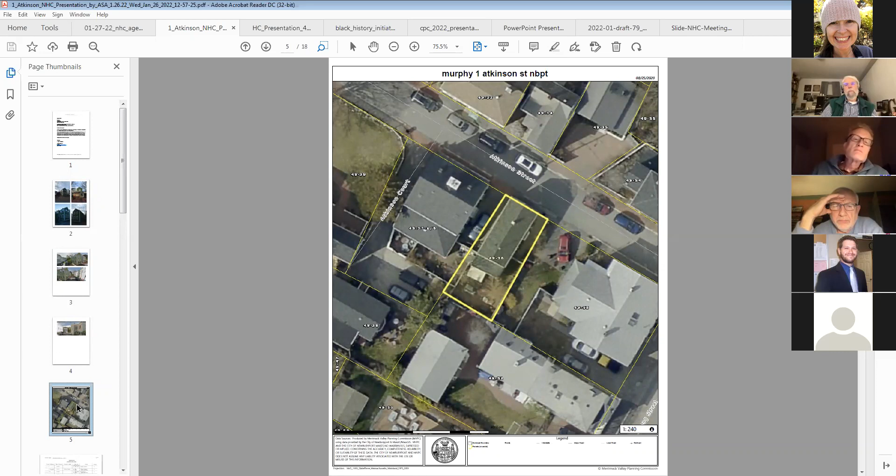And what's that whitish area just at the rear there, is that - I think if we go back to the photographs, it might be easier to tell what that is. Yeah, you see it's sort of a freestanding shed that would be removed. Oh, I see.

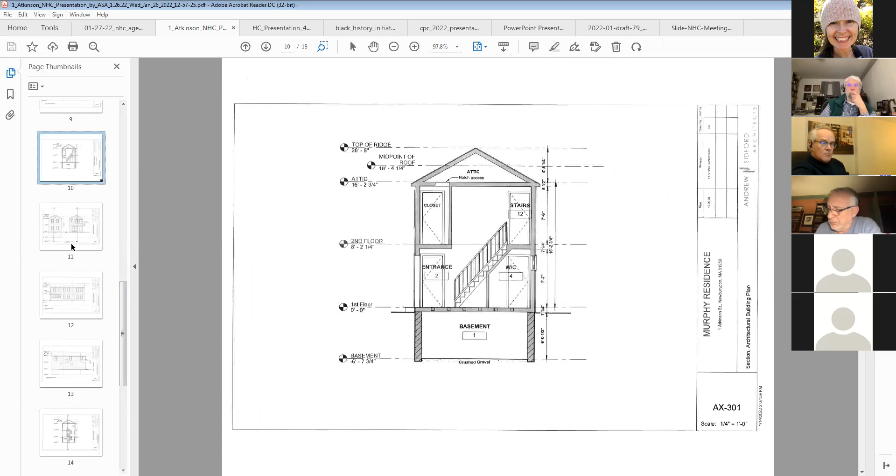You'll excuse me, but this presentation is actually for zoning as well, so some of these we don't need to go through. This one, you'll see on the left, this is the front elevation of the house and it does not change.

The back elevation shows the new windows being added on the rear facade to the rear yard. They won't be seen from the street. The intention was to use the same 2/2 design of the original house, but we're adding a little more light into a master bedroom and a kitchen downstairs. This shows that shape-wise and proportion-wise, it's the same as the front of the house.

Next slide please. This shows the side elevation, the dotted line shows where the proposed fill-in is. The original windows of the house remain the same, primarily. It's in the back section, where the new kitchen and master bedroom are, that we've added a few, but the intent is to use the original materials, the original detailing, and 2/2 windows. So that shows the rear.

So did I hear you say that this window here, you would try to match the existing windows on that side? Right, you can see the proportions of the new window in the back there - that is the same proportion and size as the original windows.

And when we had to change it because it's above a counter, we're still going with the 2/2 window. That's the kitchen below, I assume. Yeah, correct. Maybe I wonder if it's just a drawing.

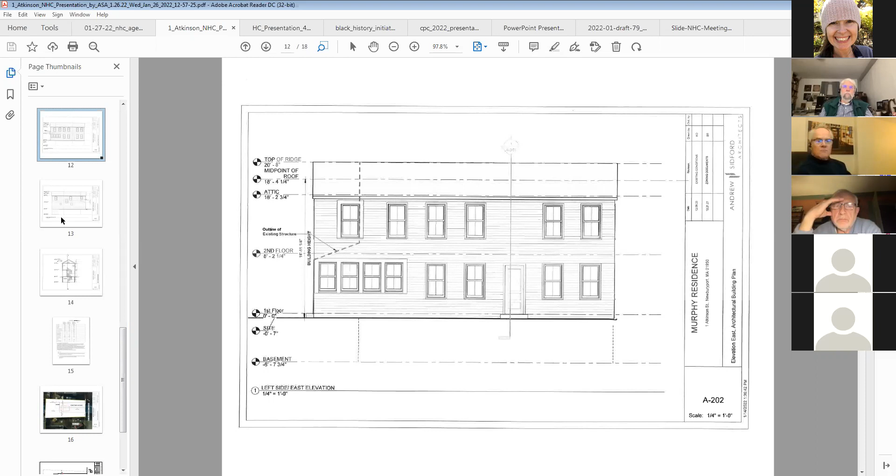Thank you. Next slide please. Again, this shows from the other side, we've added a new window at a new stair, and that's to match the windows in the front of the building. And where we can, in the back, you can see where we've intended to fill in.

And I assume in your demo calculations you included whatever demolition, wall demolition was required for the new window openings? I think so, I honestly don't have those numbers in front of me, but I believe so. Yeah, because that would be the norm. So that's about all I have for the presentation.

Yeah, it's pretty straightforward. Before I open it to public comment, is there any question or clarification from my fellow panelists, board members?

I believe the owners are here as well, if you have questions for them. Okay, well, I'm not seeing any hands or anything like that. So why don't I officially open a public comment period?

And I explained the rules earlier. If you would like to make a comment, can be pro, con, or neutral, whatever, please use the Zoom controls to raise your hand so that Caitlin, who's running the meeting, can recognize you so we can unmute you and allow you to be heard. So we'll pause for a few moments while we see if anyone wishes to be heard.

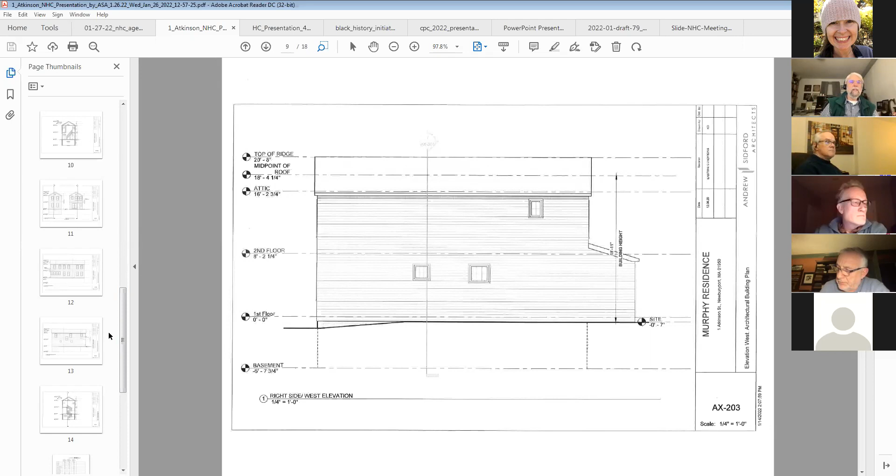As long as we're on the topic of windows, one last question. On the back, if you can see it, probably around slide 11, Caitlin, where we're looking at the rear view - those, you've got 2 windows that look like they're in funhouse mirrors, stretched almost all the way to the ground. Are those actually regular windows, or patio door windows? What's going on there?

They're regular, depending on the definition of regular windows. Those are tall double hung windows to bring light into the kitchen, because that's where there's no cabinetry, and we're really trying to open up some views and light to the backyard. So the sill of that window will be quite close to the floor, it looks like. Yes, okay.

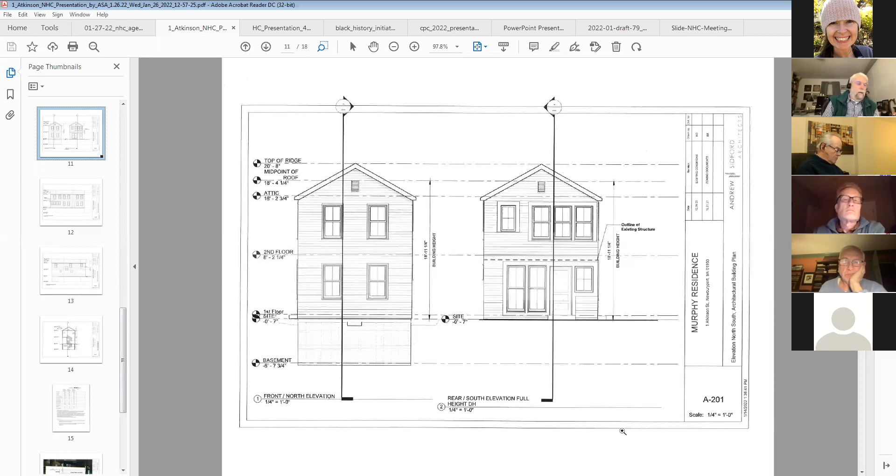Would anyone care to make a motion? At this point we need to decide if it is preferably preserved, which means we would need to approve the plans before any demolition and rebuild can happen. Do I hear such a motion? So moved, that sounded like Sandron, Mark. Okay, is that seconded?

Anyone want to second Mark's motion that it's preferably preserved? I'll second that, this is Peter. Okay, thanks Peter. So, Mr. Carnwath, your vote. It's historically significant, but preferably preserved, and we'll take a vote after this on the actual plans to approve those or not.

So Malcolm, affirmative. Thank you. Mark Sandron, yes. Thank you. Peter McNamee, yes. Thank you. Joe Morgan, yes. And the chair is yes.

So technically that imposes a 1-year demolition delay, but we'll take another vote on a motion to approve the plans and remove the demo delay based on the presented plans as explained and gone over this evening. Is there such a motion on the floor? The motion would be to approve the plans as presented and release the demo delay. This is Peter, I'll move that we approve the plans and remove the demo delay.

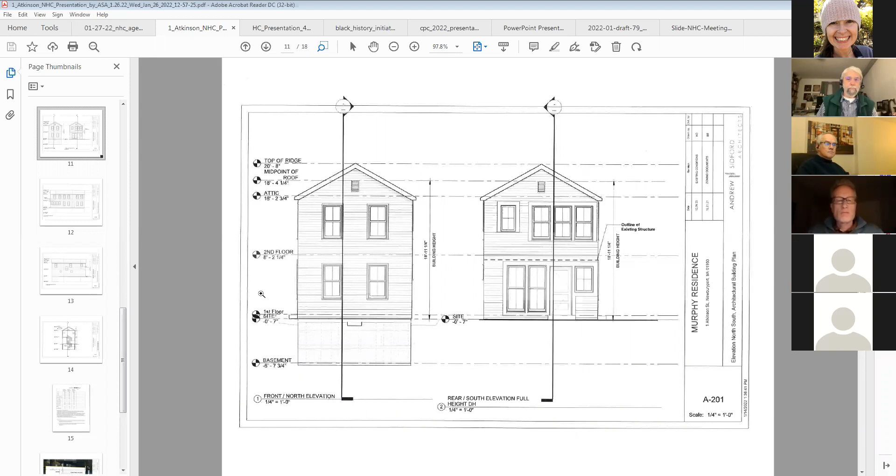Okay, so Andrew, that means - well, I'm sure you know what it means if you've been here before - that the demo delay was imposed for a matter of minutes, and your owner/applicant can proceed with the various other permits required. We've probably got an upward extension of a nonconformity or some such thing to worry about, but you can move on to the next step. Very good, appreciate your time. You're welcome, thank you everyone. Thanks for coming down.

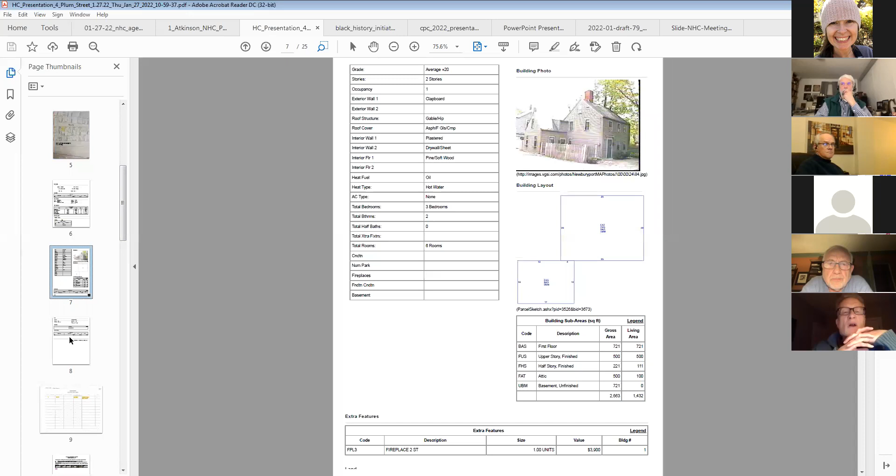And just next slide, please, Caitlin. You can skip through that one, actually—that's just to complete the property record card. So this is the district data sheet officially from the city's records for Plum Street, map 52, parcel 53, circa 1800 timber frame half house.

And then on the next slide, you can see that it actually is consistent with the historicdistrict.org records, but just so we're singing from the same sheet of music, this is what we have for the district data sheets. So going to the next slide.

We also saw additional information—the Form A for the Washington Street Residential District. It does include Plum Street in the broader map of everything in that neighborhood. It doesn't mention Plum Street specifically in its text—I've read through it a few times. It does have a map of the houses and structures.

Particularly, it circles the ones that have their own Form B and have been singled out. The closest one is two houses down on Elm Street, 15-17 Elm Street. That does have its own Form B that I've also reviewed. It doesn't really lend any breadcrumbs about 4 Plum Street.

The Form A does mention that this area provides an excellent illustration of the development of a residential area which had its beginnings in the early 18th century. Architectural styles dating from the mid to late 19th century are also found in this area, which I think is a very accurate description of the Plum Elm Street neighborhood. If you recall the district data sheet for Elm Street, it has a mix of early to mid-1700s homes, but also early to later 1800s homes. So that's probably the best way to describe the neighborhood.

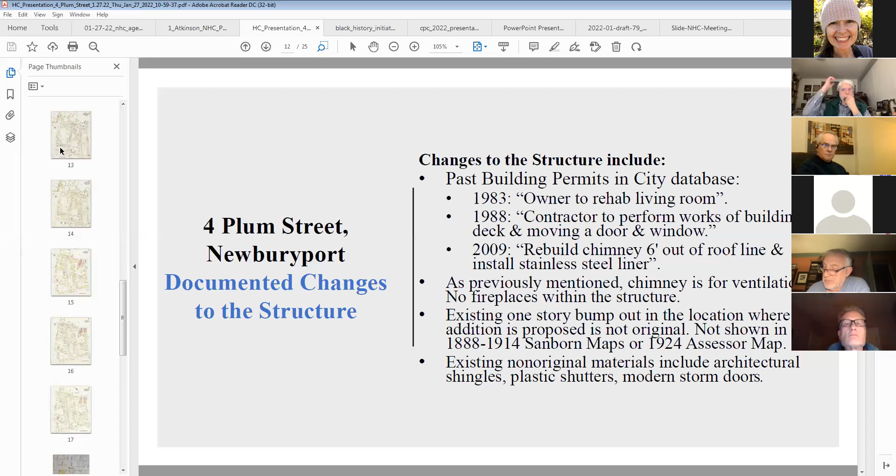Probably the biggest, most noticeable change is that one-story bump out, which is the location where the addition is proposed by the applicant. The Sanborn maps we included don't show that bump out, nor does the 1924 Assessor's Map. There are also non-original materials, including architectural shingles, the plastic shutters being removed, and the modern storm doors.

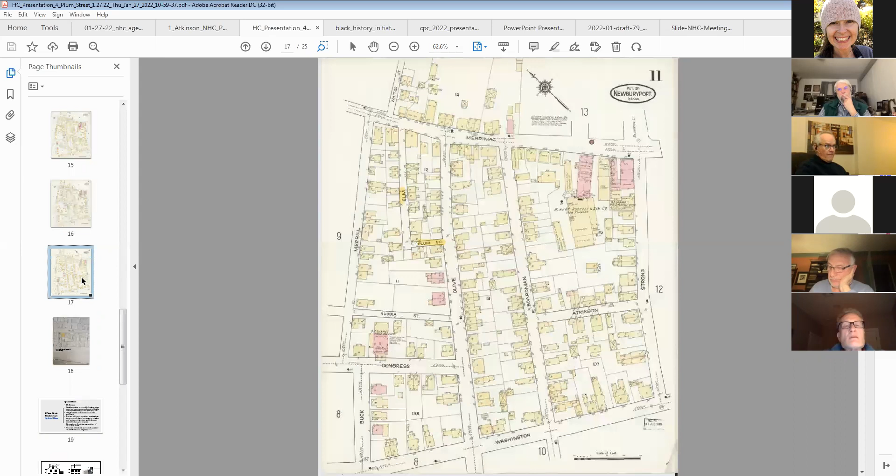Finally, we've seen this already, but again, 1924—no bump out off the back. So finally, let's get to the updated plans. Next slide, please.

I'll talk about the plans briefly—Jeff will go over them more in depth. First of all, there's no dormer proposed in the new set of plans. I think that was the strongest feedback we got at the prior meeting, so that's gone, not proposed, and not included in the plans currently in front of you.

The addition has been made smaller. It's located where the one-story bump out currently exists, and it's gotten a little smaller in footprint, I'm informed, and the height is much lower—it's gone down below the ridge of the existing structure. Also, the overhang over the doorway is a lot smaller now.

Structurally, the new addition is going to be supported by its own foundation. It's a lot less invasive, cutting into a lot less of the existing structure and roof, placing less strain on the existing roof system. The dormer's gone, so there's a lot less pressure on the structure, and because it's smaller and cuts into less of the structure, it's far more reversible than what was previously proposed.

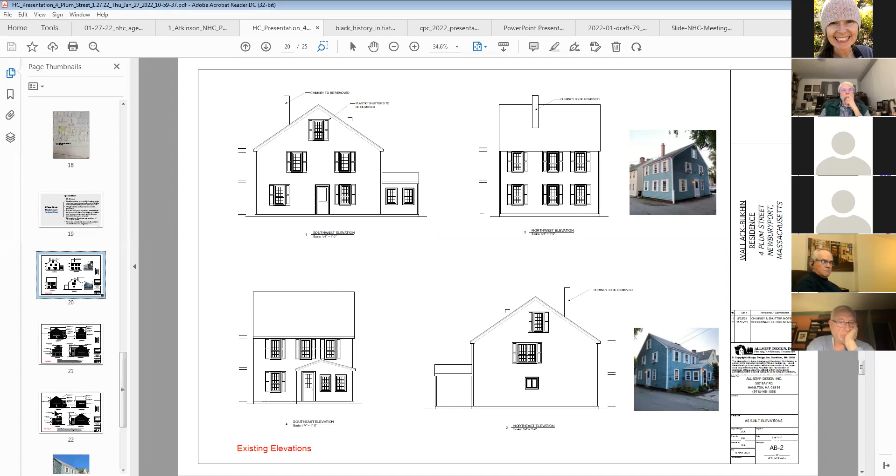If you could scroll down to the two renderings—right, go down one more please, the previous one, and one more down. This was our proposal that we came forward with. You don't see the other side, which had the dormer proposals, so this is what people were responding to. I think the board members were talking about the scale of the project, what we're proposing compared to others.

I do want to point out in this rendering that you can see the gable ends of neighboring buildings, so I didn't think we were trying to push too hard on that, but everyone felt pretty strongly that this was a very old building. Turns out by the research done that it's not as old as I think Joe was interested in finding out about, so that's an answer to your concerns, Joe.

There was a lot of discussion about how this building would look as you're approaching it from down Plum Street, and there was a lot of concern that the old building really couldn't support the level of development that we were proposing and contemplating.

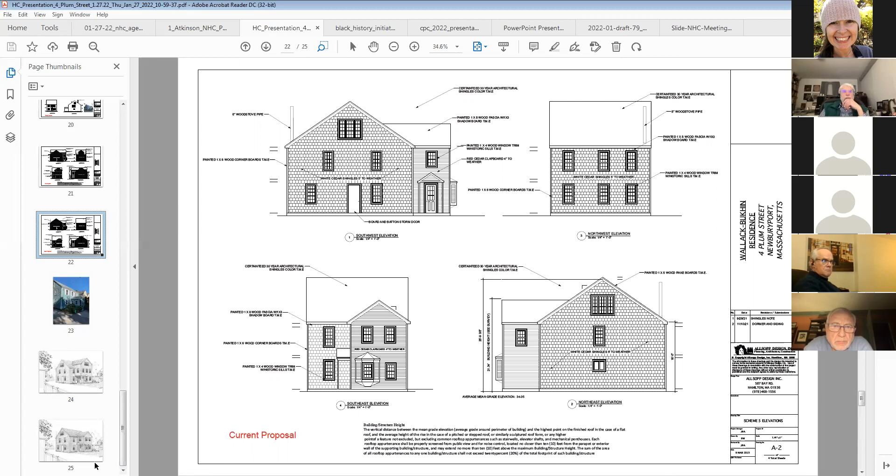So I guess we can go up to the newer rendering—is it up or down? The newer rendering was just below it, number 25. There we go.

In the previous proposals, we were actually removing the roof structure and building a new roof structure. A lot of that had to do with requiring structural ridges and essentially building an independent roof system to sit atop the original building structure. In this case, we are not removing the roof, we're not removing the gables. We are going to preserve what timber frame is left up in the attic space, which is really the only original fabric that remains in this building.

The addition has been reduced to the footprint, with the exception of the little gable entrance facing Elm Street. The total weight and structure of this addition, extended vertically, is going to be carried within itself. There's a small roof overlay that will need some attention on the inside with structure, but it's just an overlay and doesn't really require any kind of structural change.

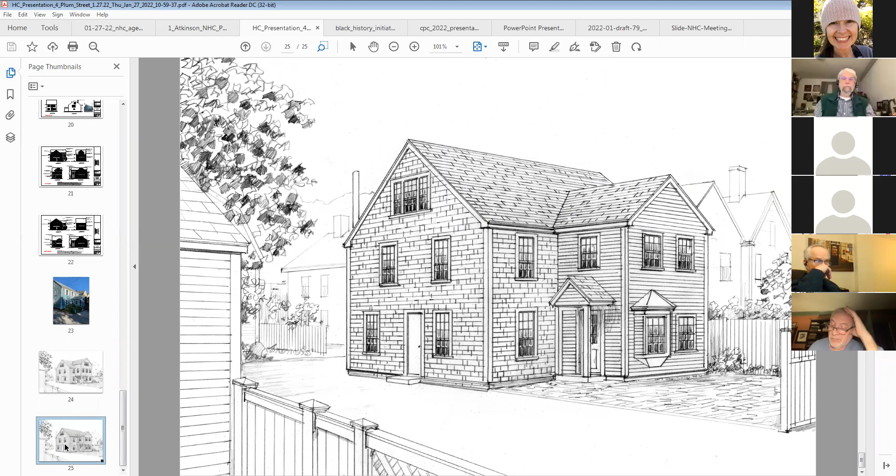So, fellow board members, what do you think? Since I ended with you last time, Joe, we'll start with you this time. Any thoughts or comments?

Mr. Morgan, did you? Yeah, there you go. So bear with me, I've had an unstable internet connection this evening, so I may cut out at some point.

First, I wanted to say a quick thank you for the additional research done by Ben, and the information corresponds to a little further research that I did, concerning 23 Elm. It's very confusing, but this seems to have cleared it up. Seems like it's an early 1800s building, say 1830s, somewhere in there, that is Plum Street, before Plum Street. So thank you again, this is very helpful. All of that was very helpful.

Welcome. And Ben, I did lose your explanation when you were talking about structure. You used the term reversibility. Do you mind quickly repeating what you meant by that?

So when we discussed earlier in the week, and Jeff, do feel free to chime in, we were discussing it in preparation for the meeting. How oftentimes with what's in front of the board, a consideration is whether reversibility, whether if you needed to remove something, you'd be able to do it without damaging the structure. So again, Jeff, chime in if you have more insight, but with this being less invasive, if it ever needed restoration work or even removal of that portion of the addition, it'd be far easier than the prior proposal that was in front of you.

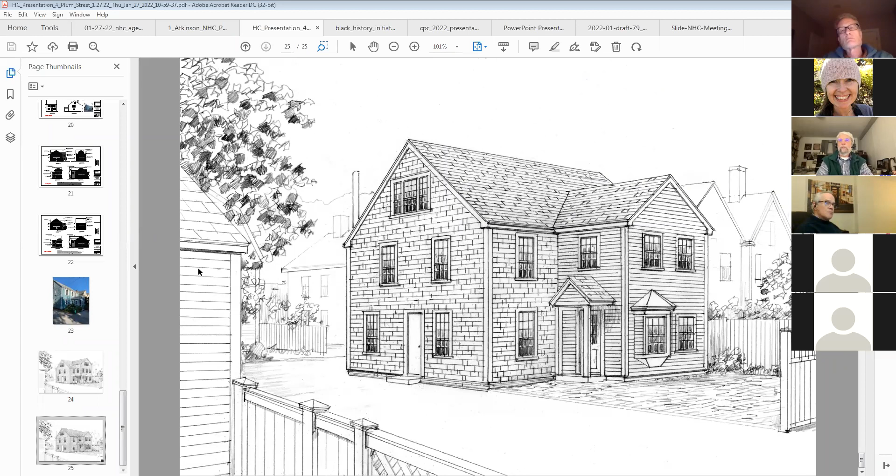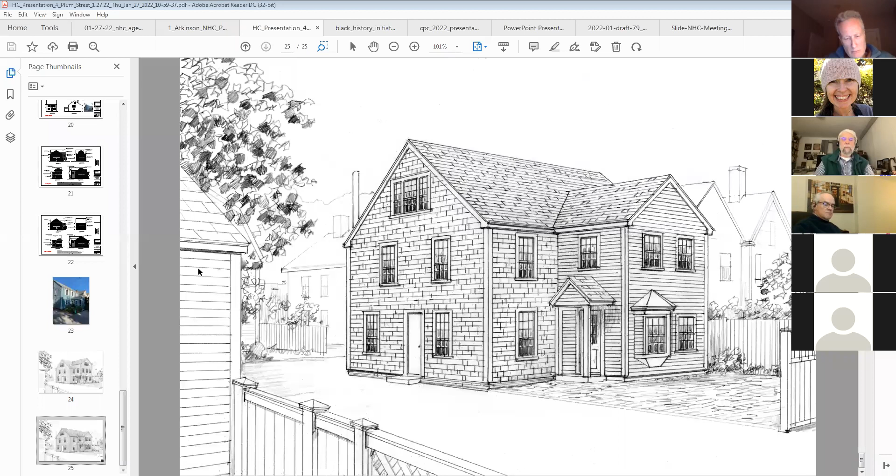And with the comment that when I saw the rendering posted several days ago, I was very pleased that you had taken significant steps in scaling this down. I realize the owner is probably sacrificing a good bit of room they were hoping to get on that third floor, but I think the neighborhood will be much better served, its historic character will be much better preserved with this plan. So thank you for going through this.

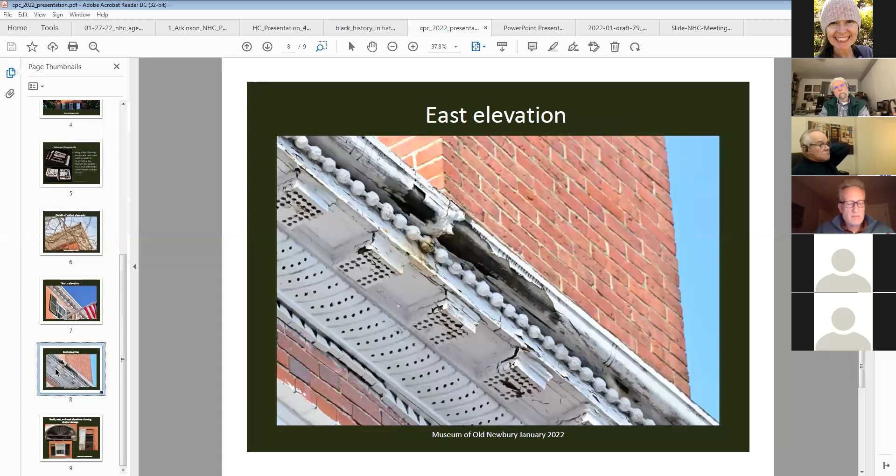We have done patchwork, but no serious restoration and rebuilding of the shutters over the last few years. And we believe that there are enough of them in good shape that we can restore them at this point rather than replacing them. And so that is our plan of action.

I believe that's the last slide. So I'd like to thank you all for allowing us to present tonight and answer any questions that you might have.

Thank you, Susan. I'll just comment to the rest. I've been on the board long enough, I know Malcolm probably has as well. Some of you may have been around to remember some of your previous projects. I especially remember the electrical work, and my understanding is that it's now been completed.

You know, this building is normally interesting. Normally we are concerned with the exterior of buildings, so this particular application you're bringing to us tonight is very relevant in that. It's also an interesting situation in that usually we don't get involved with interiors, but where you're a museum, it's a whole different situation where the interior is also sort of a public space.

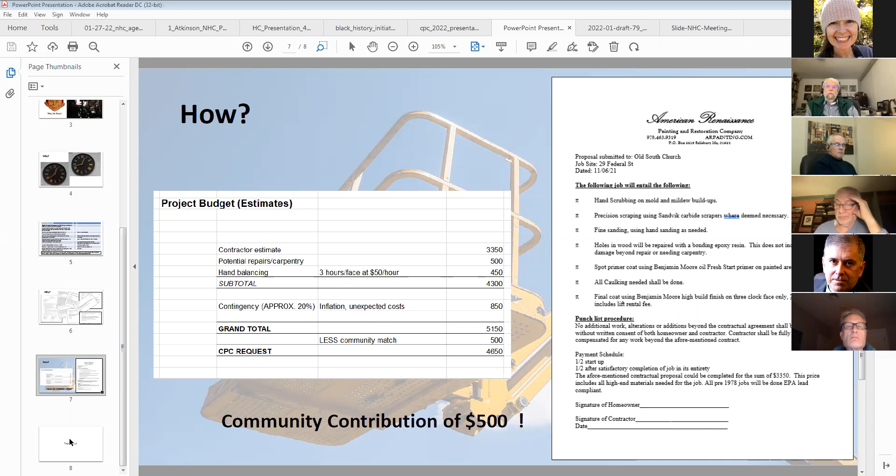Good question. Well, one option and potential contingency plan, I'm kind of riffing here, but you'll notice -- Caitlin, if you can go back to the pictures of the clock faces -- those are the sides that face the sun, and they've gotten the most damage, amazingly enough. The north side could probably go another year or two. So worst case, if we're finding a lot of damage, I would take care of those two first, and then come back and figure out what to do with the north side at a later date.

That makes sense. Yeah, I was surprised by a similar phenomenon -- I have on my house, Jack, that the side that faces the sun, I don't know if it's the ultraviolet from the sun, but it's pretty damaging. You might get mildew or moss on the north side, but the south side takes a beating. Anyway, wear that suntan lotion.

There you go. Yeah, okay. Any other thoughts, comments, or motions?

It's Joe. I was just wondering, could we move that the project is fine, like we did for the signage, the Afro-American signage.

Could we say that, yes, it's a legitimate historically enhancing project for the city of Newburyport, but leave it to the CPC to figure out the budgetary details and the management of it?